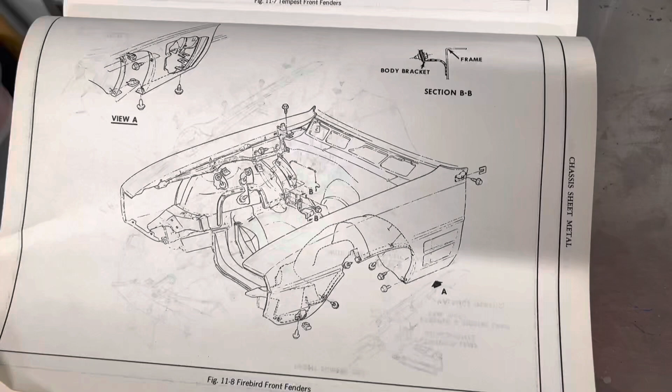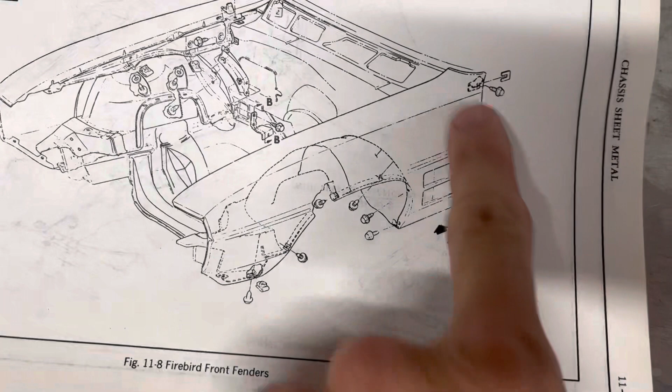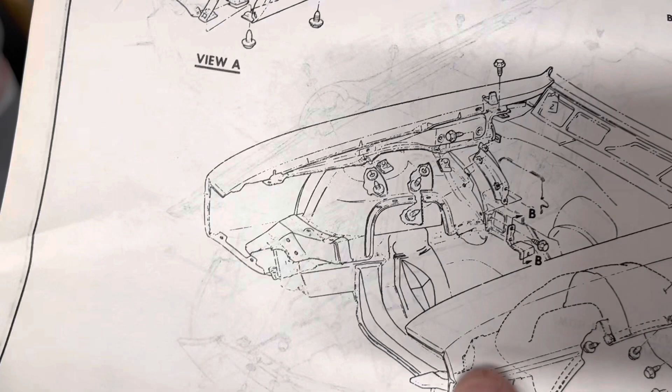All right, we're gonna try to take the fenders off. Looking at the bolts here, we've got one down low underneath, and we're gonna have the whole wheel well section of bolts. Up here is in the door panel, door trim jamb, sorry - open the door, it's in there. And then up on both tops, you've got them up here. There's a couple screws up front that aren't labeled here, but I'll show you those. And that's pretty much what I'm seeing there, other than there is a couple breakdowns.

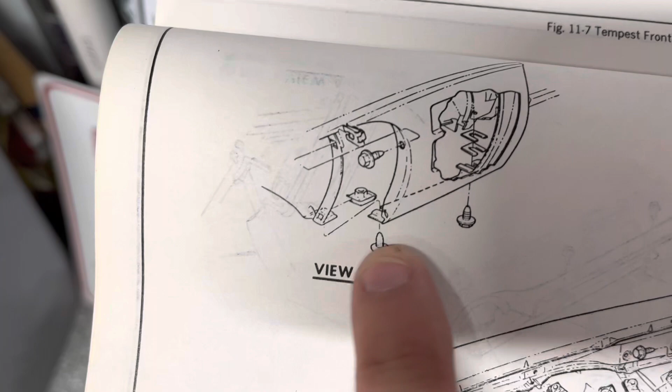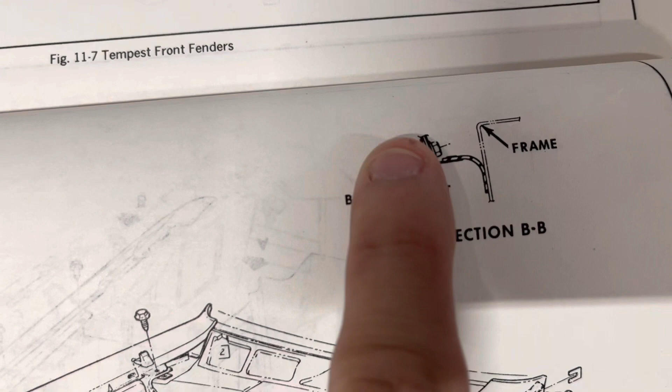So section A here, where they've got the arrow, if you break it down there's a couple more, plus the shims you want to keep track of. And then section B over here could be tricky - it's actually on the frame they're telling us, so there's a bracket there. Hopefully that's not in backwards, which has been the case on my car - a lot of backwards or mismatched bolts. So let's take a look at them on the car and see what we got.

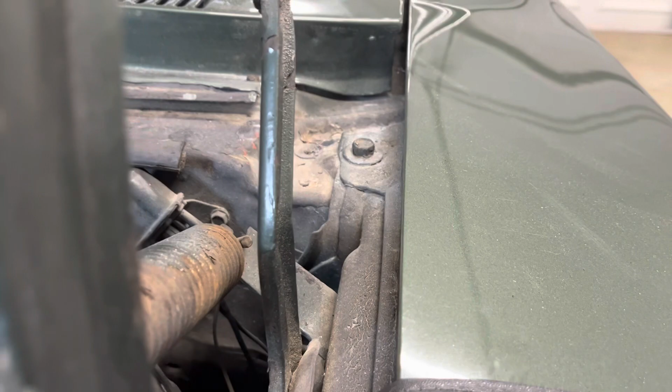Okay, let's try to find these locations. We've got the upper bolt here at the top of the fender that are normally shimmed. You can see on this one there's a lot of shims, and I've got zero on this one, so that's intriguing. And then at the front of the fender you've got two bolts there, or screws - that could be tricky, those are painted, so we'll see.

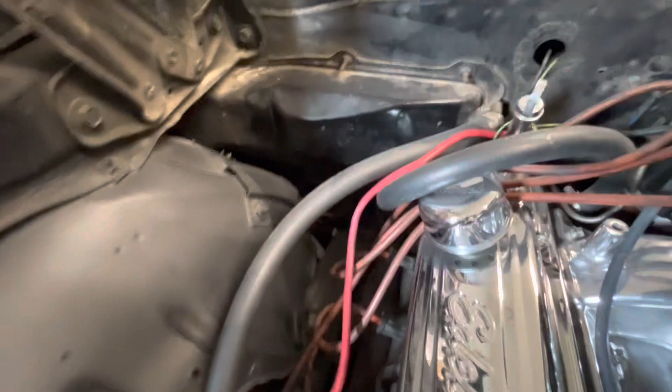And then obviously we're gonna have the ones all up through the wheel well. And then there's one - we talked about that frame bracket - and I'm not totally sure yet what that's gonna look like till we get down underneath, but I do believe I've got an eye on it down in there, so we'll see how hard that's gonna be to reach from top or bottom. And then we've got the one in the door jamb - you can see it here, a ton of shims on that one. So we'll take a look at that, see what we got going on.

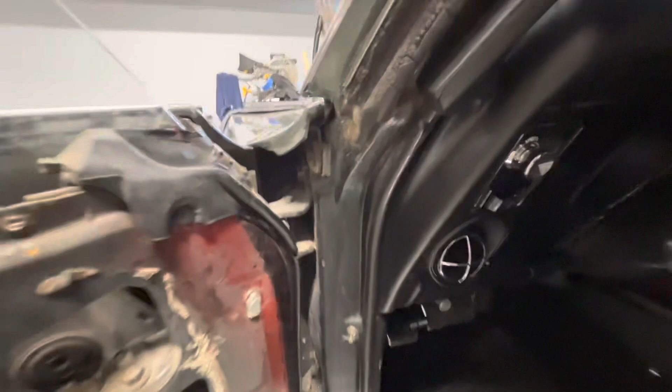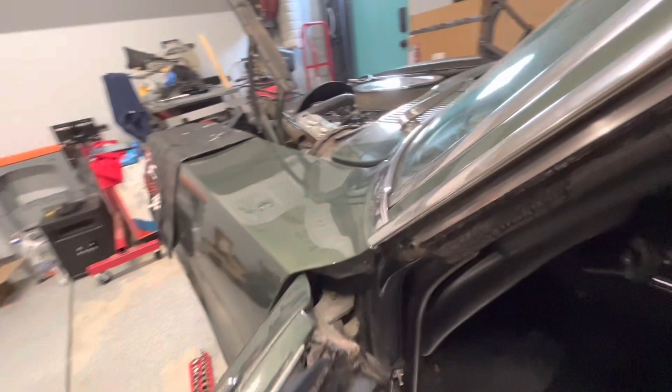I'm gonna try to document these, put them back as close as possible. I do have some fitment issues on mine with some weird gaps up here, so obviously I don't know that I'll be putting them back with the same amount of shims, but we'll figure that out later.

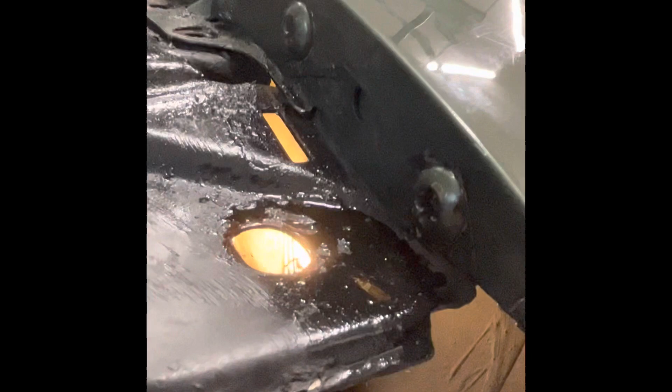Okay, I got all the bolts out of the fender. I've just loosened up here, finger tightened to hold it in place back there because still working on the front end - everything underneath is done. This is the stubborn part today. These two screws, they've been painted over in a previous restoration. Kind of wanting to strip out, but we're trying to be careful. They're not turning.

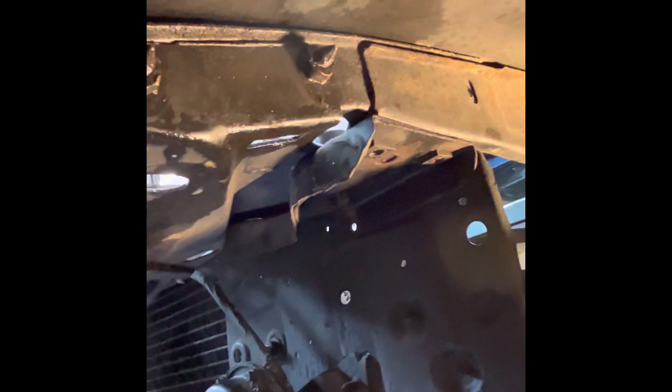Back here you've got nuts that I believe are welded in. I am not able to break those loose, so we're gonna soak them and see what happens. Other than that, I had a good run on it this morning until this point, so time to stop when you get frustrated.

On the fender, I've taken out the bolt in the door jamb. This one is loose and finger tightened just to hold the fender in place. This one here is taken out, and we've got the one right there out. I've got to loosen this one in the wheel well, and I've got another one here to loosen up in the wheel well. I'll show you those locations.

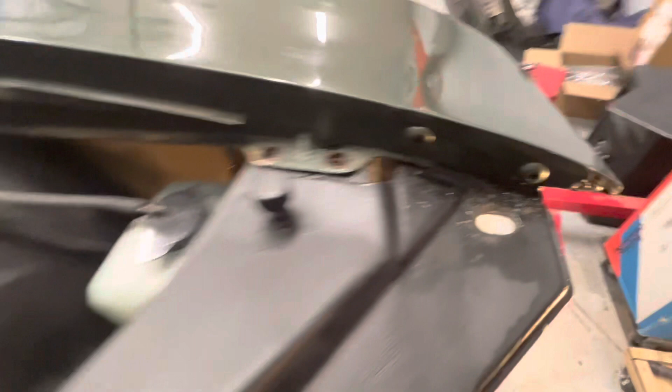There is a bracket that holds this wheel well in place - you can see that right there. Got to loosen that up on the inside of the wheel well as well. And we've got everything else loosened here. These two screws are becoming a problem - they were painted in, I cannot get them out. They are rusted to this welded nut on the back side here.

As you can see, those two up in there - this little gusset panel here, you can purchase very cheap. So I'm gonna just go ahead and take this screw out and this screw out. That can come with the fender. I may end up replacing it, or drilling those out once I've got this off. I don't even know if I need a fender because it may be rusted - I haven't had a chance to look. But that's how we're gonna take this out.

I wish these two would come out and then we could just take that fender off, but unfortunately - yeah, old restoration. So here we go.

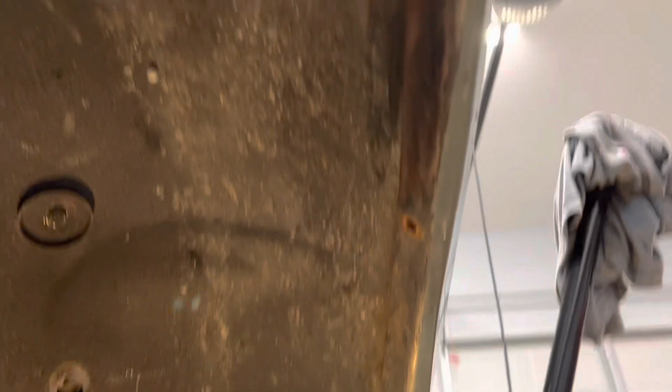Okay, so we're kind of taking the wheel well and the fender out at the same time. On the edge of the fender you obviously have all these bolts that you had to take out, these two underneath. And then in the wheel well you've got this one back here and these two that hold the bracket to the frame rail. These hold to the upper rail on the fender. I've got one left there, and then that's pretty much it.

You do have two in here that go to the core support, and it looks like the wheel well horseshoes around the body mount bushing. I'll give you a better angle here - you can see these two that go to the core support, or radiator support, and you can kind of see that horseshoe shape of the wheel well around that body mount bushing. So I may have to take the body mount bushing out there - we'll see as we get into it. And yeah, that's kind of where we're at right now.

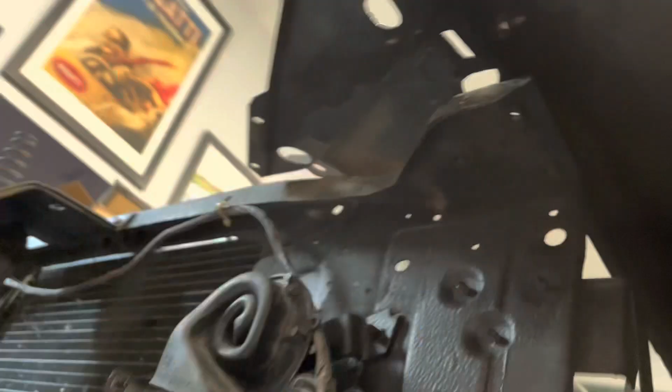I've already taken the bracket out that goes right here to the fender with the bumper, loosened up the gusset there. And it's gonna come out in one piece, obviously, because these two are frozen. So, cool - and there you go. Fender is off, wheel well, everything is completely removed.

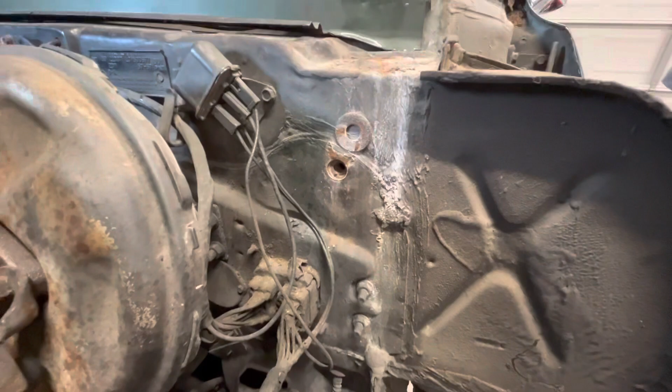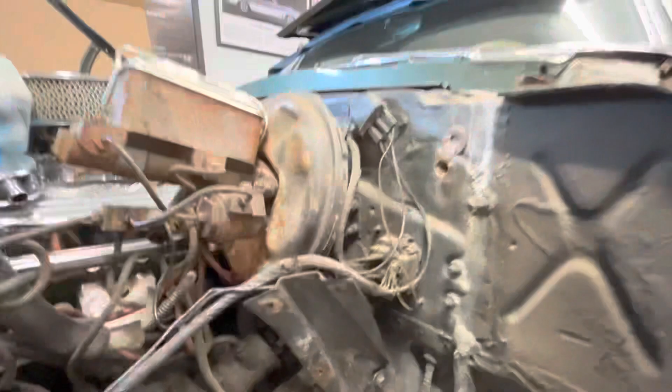I can get in here a little better to show you more of the mounting points. Obviously you've got the upper here, you've got one right there for that upper frame rail. Coming around here, you can see was the mount for the fender up in the door jamb. Down low you've got down here - this is the bracket that was behind there that you have to take the bolts out of, so there's 3 - 1, 2, and 3 there.

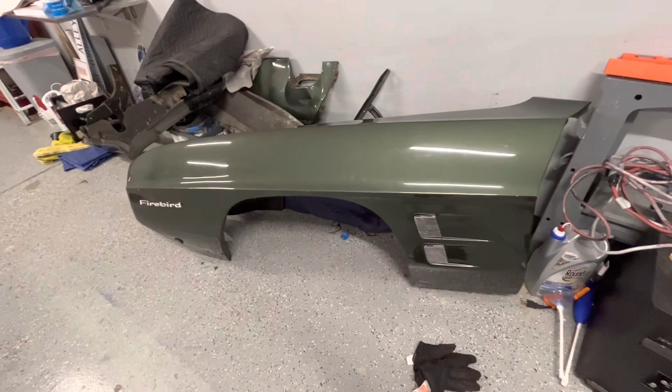These were the two mounts in the radiator core support. Took the body mount bushing out just to have it out of the way, just in case. And then we had the gusset that mounted up here - so that feels good, that's a good spot. Everything kind of came off in one gigantic unit. So there we go, that is the fender removal, and we're at a great spot there.